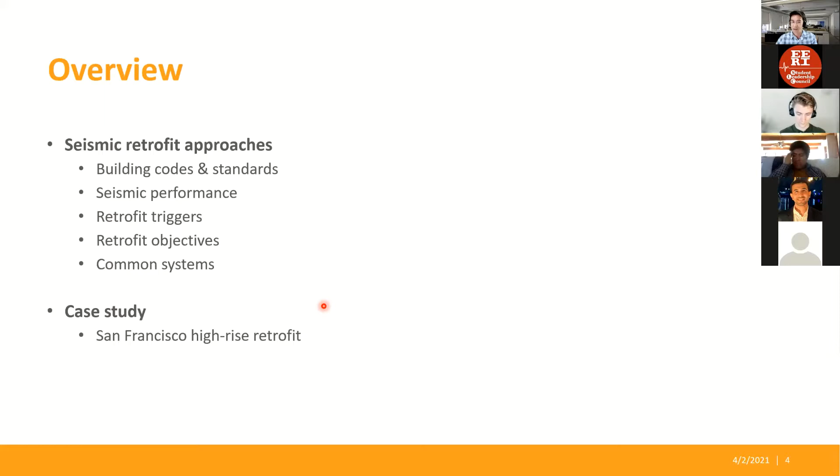So just to set the scene in terms of the regulatory environment in which we operate as practicing structural engineers, certainly in the US, we commonly design new buildings in accordance with the International Building Code, or sometimes, depending on the state, there might be a local version of the IBC, such as in California, the California Building Code, which essentially follows the same format as the IBC but has localized amendments specific to the needs of the state. The IBC works in conjunction with a standard called ASCE 7 that defines the loads, seismic hazards, and other design criteria we use to proportion, design, and run through code-conforming checks for new construction.

That works really well because it's almost a cookbook approach, where you look up a series of prescriptive requirements the building is required to meet, and you proportion and design and run member checks, ensure the building meets the drift requirements prescribed by the building code, and make sure all your demands are less than the capacities prescribed by the building code, using a single R factor for seismic design that divides the elastic forces down to a level of load used for design of code-conforming structures meeting all these prescriptive detailing requirements, whether for concrete, steel, or other construction types. This approach works really well where we have a lot of control over the variables in a new building.

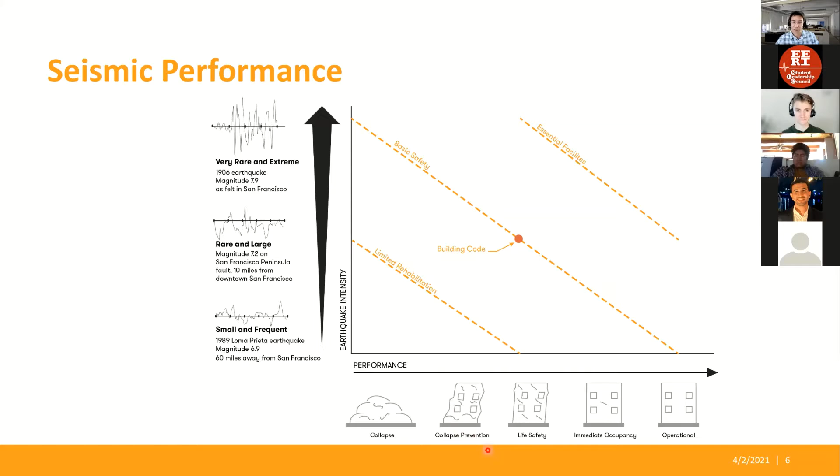They might, once you look at all the different limit states and deficiencies, perform at or meet that performance objective at a lower level of shaking, or they may not meet it at all—the analyses may show the building collapses, or qualify that it meets a lower level of performance at a lower ground shaking intensity in the as-is condition. This framework helps us understand where the existing building sits, and if a retrofit is triggered, what we're trying to achieve: are we trying to lift the performance, lift the hazard level at which the building meets a specific objective, or if it sits at collapse prevention, can we lift the shaking level at which it continues to meet collapse prevention, if that's the objective selected or mandated by a city or client?

So if we're able to run through some initial analyses that give us a picture of how the building is expected to perform at increasing levels of input ground motion or hazard, we can start to understand where the vulnerabilities lie, where the damage may concentrate in the building, and we can then inform ourselves as to how we might think about retrofitting the building.

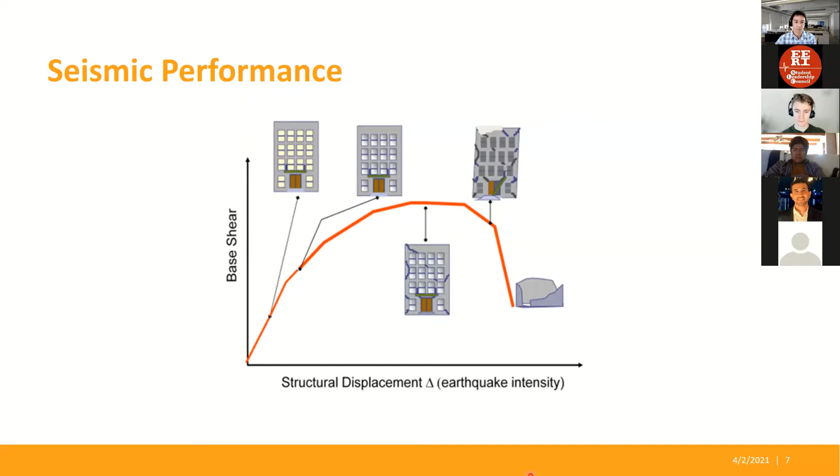There are 4 broadly defined levels of performance that feed into very detailed acceptance criteria and modeling parameters for components: collapse prevention, life safety, and this, as I mentioned before, is analogous to the level of performance implied by the building code when a code-conforming building is subjected to the design basis earthquake.

For higher risk category or higher occupancy structures, perhaps essential service buildings, I understand the balsa wood models you're all developing are around a hypothetical hospital. A hospital would fit the definition of an essential services building that serves a critical function to the community after an earthquake or major disaster.

Both the building code and ASCE 41 acknowledge that by requiring more stringent design requirements. This is reflected in ASCE 41 by requiring that at the design basis earthquake, or BSE-1 hazard as it's defined in ASCE 41, the building meets what's termed immediate occupancy.

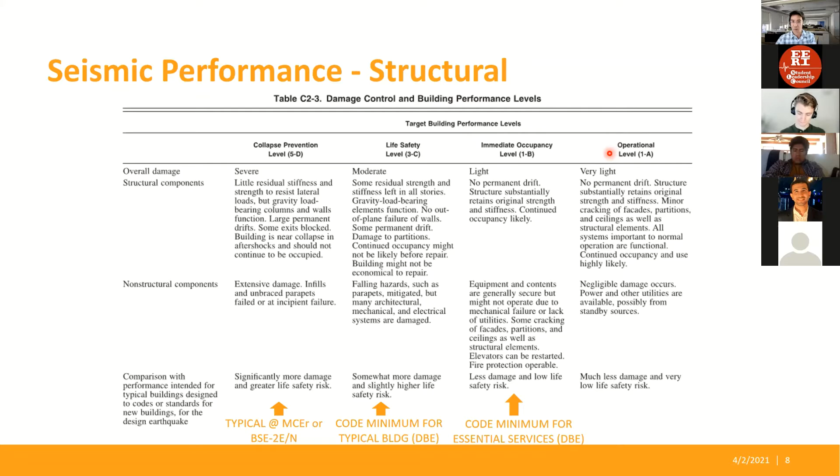There's another category as well, an even higher level of performance called operational. The main context for that—so far I've been talking about structural performance, how the primary structure of the building, the gravity systems, the lateral systems, perform in an earthquake.

The other important component, which I'll continue touching on as we go through the presentation, that we certainly pay a lot of attention to in our evaluation and retrofit work, and which is getting increasing attention at the national level, is the impact of non-structural performance on building resilience and functional recovery.

ASCE 41 does prescribe performance requirements for non-structural components as well. They're a little different from structural requirements and don't map across directly, but there are requirements for essential service facilities under what's called the position retention category of performance. There are also requirements, ideal targets to achieve for an essential service facility, around operational performance.

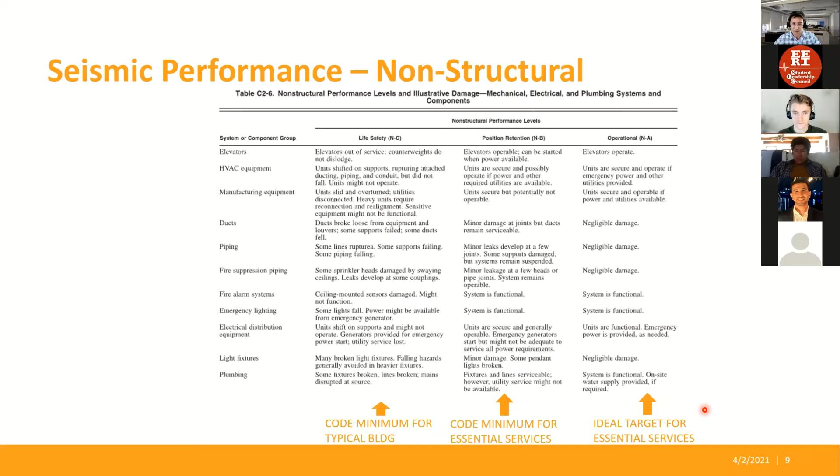A lot of the additional criteria that kick in for operational performance relate to non-structural elements and the continued operation of energized systems—electrical, mechanical components that keep a building running, elevators—making sure those components continue to be operational after a design earthquake. Not just that the building is undamaged structurally, but that components and contents helping the building function are actually operational, without needing maintenance teams to fix plugs that came loose or leaks that occurred.

To help further set the scene, I thought it'd be worth touching on why retrofit. There are all kinds of triggers that can result in us getting a project where we step through an evaluation of an existing building and start to develop retrofit schemes and ultimately implement them.

There are building code triggers in the IBC and also in the California Building Code, and other jurisdictions have their own requirements on top of that. Some common triggers: changes of occupancy, increases in occupant load, additions and alterations. If you alter the structural system of the building, you may be required to reevaluate it. If you add mass, stories, or a horizontal addition, there are triggers in the building code requiring evaluation.

And if you cross a certain threshold in the change of demand-capacity ratio, you need to step through a retrofit. In our practice, we'd typically be doing that in accordance with ASCE 41.

If the building is damaged or needs to be repaired, there are also triggers. If the damage is substantial enough, the building may need to be retrofit. Sometimes our understanding of the seismology of a given site changes, and the ground shaking intensity for the design earthquake may increase, which may trigger a retrofit as well.

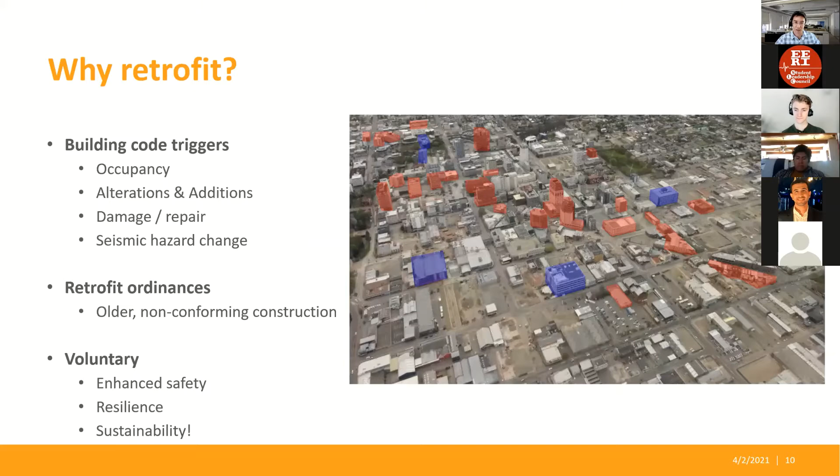We're typically looking to address one or more system characteristics. We're looking to add strength to the building. Perhaps we're looking to add stiffness, ductility capacity, energy dissipation, damping. We may also be looking to add stability or a restoring force to ensure the building can be righted and centered after the earthquake. Those are rocking, restoring systems to ensure the building doesn't have a permanent offset after a given level of shaking. We're also looking to improve the performance of non-structural components, whether through changing the building response, or improving the anchorage and bracing of non-structural components.

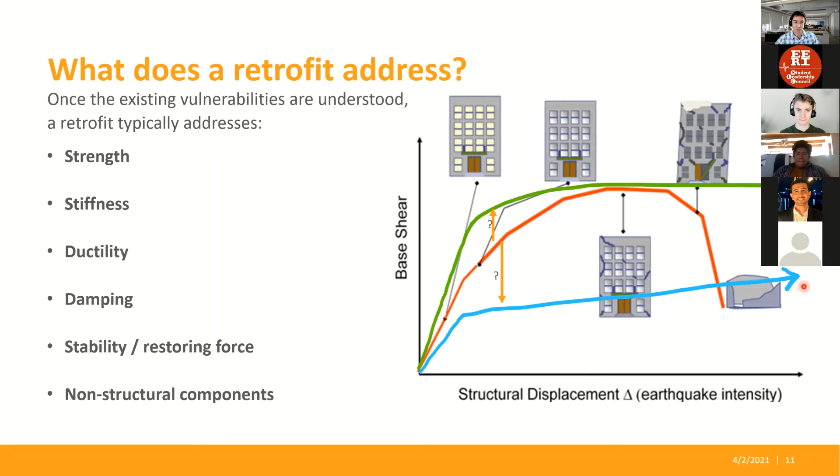So I thought it'd be good to touch on some common approaches to seismic retrofit that are outlined in a lot more detail in ASCE 41, but I'll touch on some of the ones that, and there are other systems as well beyond what I've got up here on the screen, but these are certainly approaches that we commonly use in our practice and are big proponents of.

So a few common approaches for seismic retrofit: concrete or shotcrete, which is a sprayed application of concrete to form reinforced concrete shear walls in a building.

Steel braced frames, buckling restrained braces have gained a huge amount of traction in the last 10 years in seismic retrofit. They've been used in new construction for a longer period of time, but we're seeing a lot of buckling restrained braces being introduced into seismic retrofits, perhaps to replace older non-conforming brace frame systems that don't have as good a ductility capacity. Special concentric brace frames are also a relatively stiff and somewhat ductile system that can be employed in a retrofit.

Steel plate shear walls, a little more common in new construction, but we have seen applications of steel plate shear walls as well in retrofit solutions. They're a very compact way of retrofitting buildings where space on a floor plate is tight.

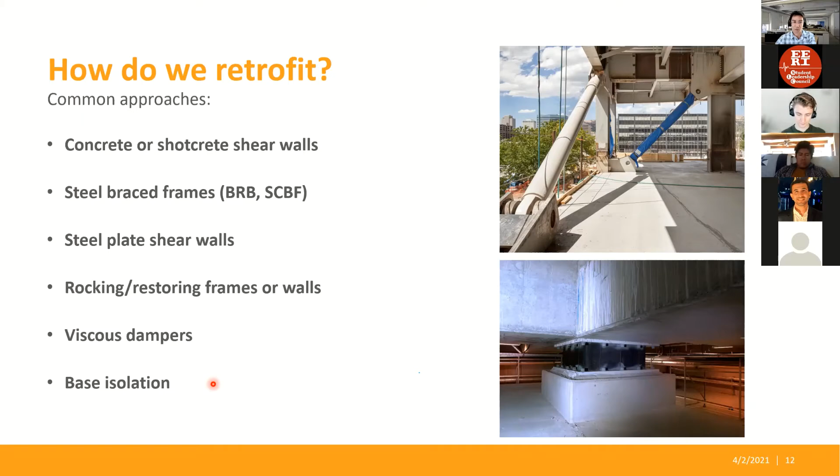So in conjunction with thinking about some of the biggest system-wide pictures around retrofit systems or alternate new systems to introduce into a building, there are other considerations that need to happen in conjunction with just thinking about the retrofit approach at a system-wide level.

We're always thinking about deformation compatibility. How are the new retrofit systems going to interact with the existing components in the building? Are they able to attract enough load or to control enough of the deformations to ensure that the existing components that may be part of the gravity system continue accommodating the deformations, or that their deformations are reduced enough that they are able to continue serving their function, say as a gravity load supporting element.

We need to evaluate the foundations and make sure that the new retrofit elements that we're introducing into the building don't add significant foundation loads in areas where we don't have enough capacity, or that we're strengthening the foundations as needed. Floor diaphragms, collectors, and connections are also important considerations.

Addressing discontinuities and irregularities in the vertical load carrying system are often a localized area that we study when there are discontinuities in the building system. And then also non-structural anchorage and bracing, trying to mitigate these types of hazards, which can have consequential effects, just even if the building is undamaged structurally.

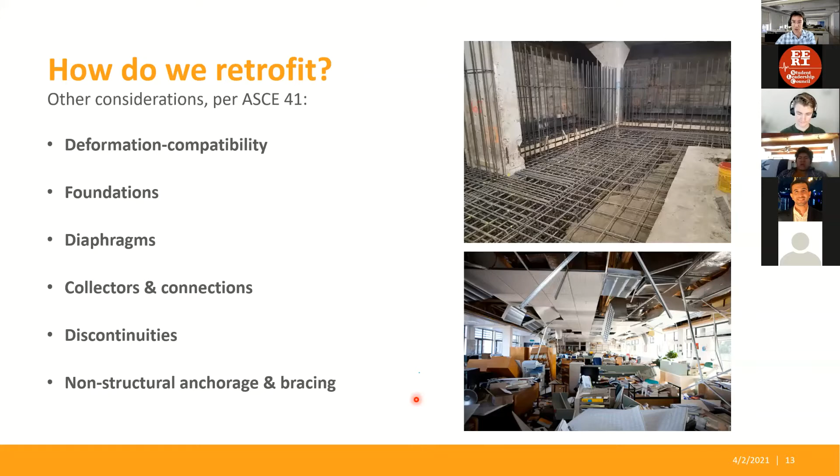So I'm going to talk a little bit in some detail about 3 different retrofit techniques that we commonly employ in our practice, and just quickly touch on pros and cons. So reinforced concrete shear walls, some pros: they're relatively stiff and strong, they have good ductility capacity, and they're a relatively inexpensive form of retrofit relative to other retrofit methods that I'll touch on.

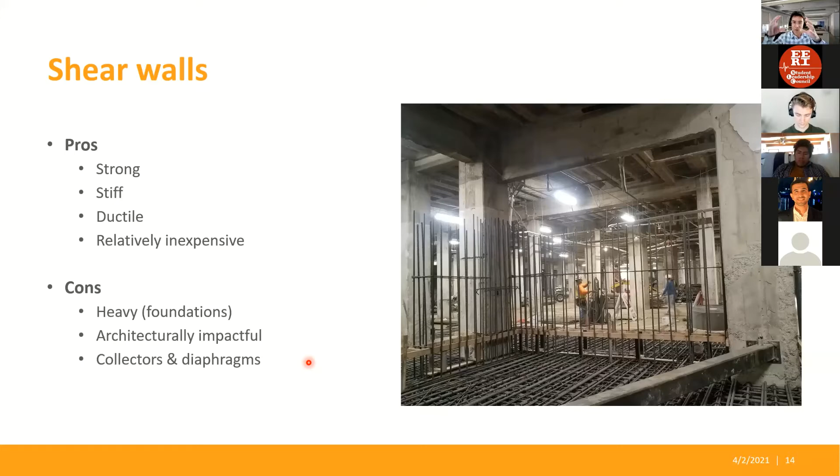Some of the cons: they tend to be heavy. They add mass to the floor plates and also to the foundations. They can be architecturally impactful. This is a concrete shear wall going in a building, and you're typically cutting off access through the floor plate, cutting off access to daylight by having solid wall elements. And you also need to introduce collectors and potentially diaphragm strengthening as well to transfer the loads around the floor plate to get them to where those shear walls are being introduced into the building.

Viscous dampers. These are a particularly effective means in relatively flexible structures in particular of reducing the demands to the primary building structure. The nice thing about viscous dampers is that they have this out of phase response with the primary lateral system of the building. So the forces that the dampers introduce are often not as additive, or not completely in phase with the response of the primary building structure. So they don't tend to add significantly to the column axial loads if you're engaging existing elements of the lateral system. And that's this out of phase relationship that we expect to see between velocity and displacement.

Diagonal braces are certainly advantageous in terms of allowing path of travel and daylight coming into the building, those sorts of things. We've found they're particularly effective at reducing base shear demands by up to 25% or more, depending on how they're configured.

The dampers are replaceable, and they have this great benefit of reducing floor accelerations. I'll share a slide on that in a second.

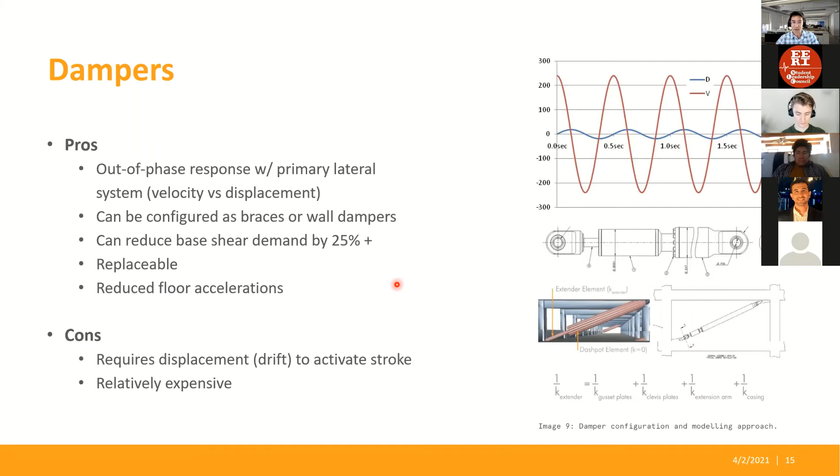We added the dampers, and we were able to pull those peak acceleration demands further up the building down to a much more manageable level for the design of the non-structural anchorage.

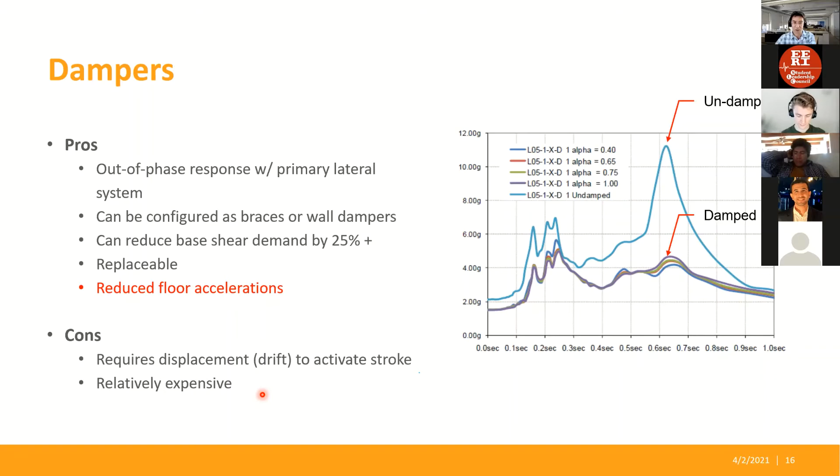A couple of cons around the use of dampers: they do require some drift to activate the stroke of the damper and develop the damping force, which means the building needs to continue displacing a reasonable amount. So deformation compatibility checks are very important to run through with a damper system. They also tend to be relatively expensive in terms of the technology. Some dampers have a lot of proprietary technology in them, and the availability of suppliers and sourcing can be a little tricky to navigate on projects.

This is an example of what I've been talking about with non-structural, especially with essential service buildings that have a lot of investment in mechanical systems to help the buildings be functional and provide the services needed. There's a lot of non-structural components and contents that need to be braced and anchored, so they don't have disproportionate consequential effects, like this building that was damaged in the Napa earthquake in 2014, where a sprinkler head or sprinkler pipe burst.

The building was otherwise not badly damaged structurally, but the consequence of a sprinkler bursting and flooding the building for a couple of hours until they could shut the water off resulted in a very expensive rebuild of the ground floor, with all the non-structural finishes being torn out due to water damage.

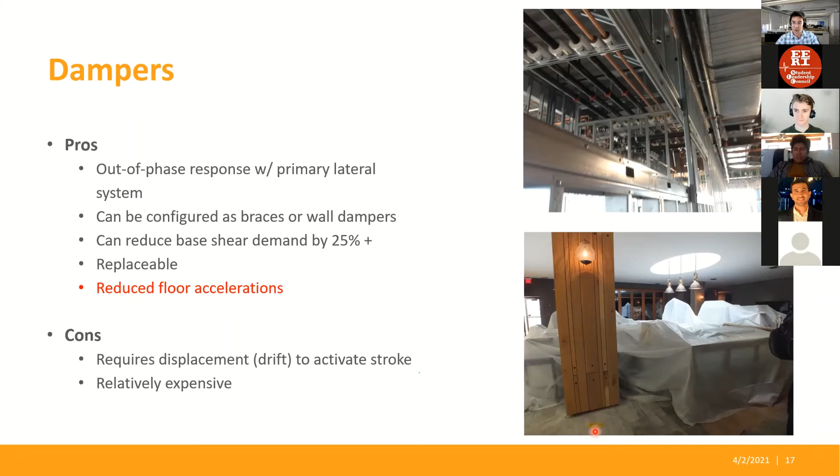This is an example of how we implemented dampers on a high-rise building in Wellington, New Zealand. We completed this project a couple of years ago. This building was relatively flexible, but had reasonably good strength and drift capacity—though it was overly flexible and had a pounding problem with an adjacent structure.

So we introduced dampers over the full height of the building in the flexible or weak direction, transverse. We were able to significantly pull back the demands in the building and also mitigate this pounding hazard as well.

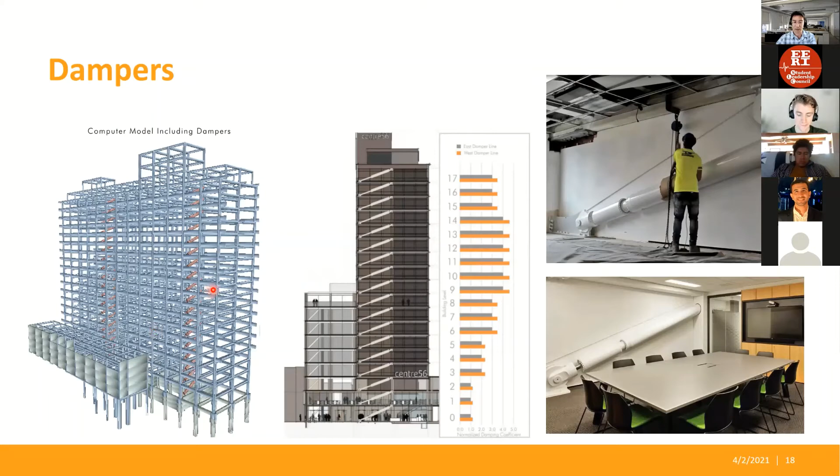Base isolation is seen as kind of the deluxe or Cadillac solution for the retrofit of particularly monumental and historic buildings, where we're trying to minimize the amount of retrofit work in the superstructure because of the impact on the architectural program or on historic finishes and fabric. There are a number of different base isolation technologies available: lead rubber bearings, friction pendulum sliders.

These components, introduced at the base of the building, help isolate the superstructure from the response of the ground by accommodating the ground motion across this isolation plane. They're self-centering, so the building returns to a zero offset after the earthquake, and the units are also replaceable if needed.

Some issues to keep an eye out for with base isolation: uplift or overturning demands can be difficult to accommodate with the isolators, as they're not great at resisting tension loads.

From a design office perspective, the design and approval process usually requires third-party peer review, so the design schedule needs to take that into account—certainly an issue we run into when considering whether base isolation is appropriate for some projects. And there's a cost premium associated with them for a couple of different reasons.

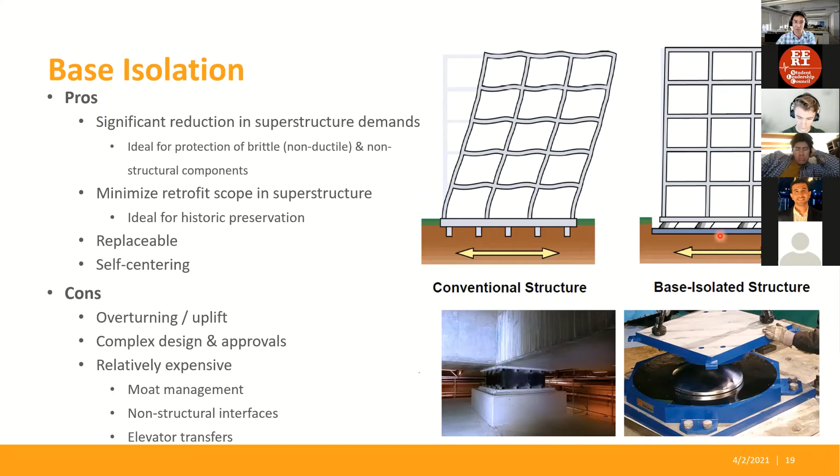But the big benefit from a structural perspective is that the isolation system shifts the response of the building significantly. You can shift the period from a fixed base building at say a half second out to 2 or 3 seconds, and that really cuts the input ground shaking demands down significantly. You also get the added benefit of increased damping. The isolators have significant damping capacity, 10, 20% or more, and that helps further reduce the input demands out of that elongated period.

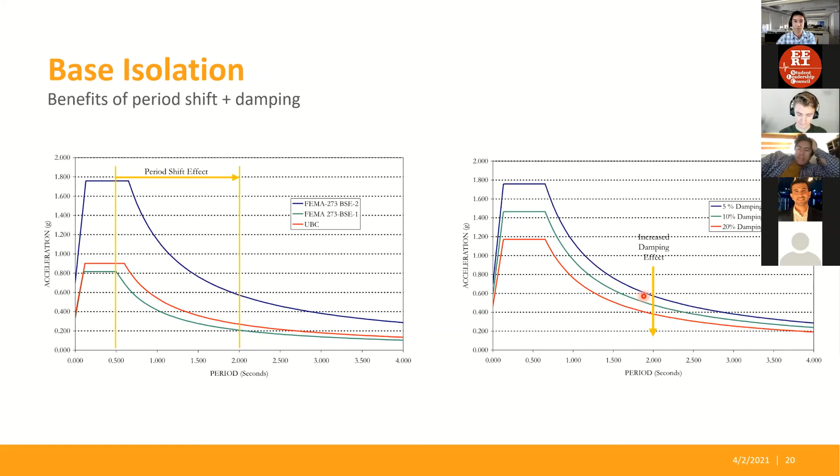So I thought I would share a quick case study of a retrofit I worked on in downtown San Francisco a few years ago that was completed, particularly near and dear to my heart. It's 140 New Montgomery Street in downtown, just south of Market Street for those familiar with San Francisco. I thought this would be a great way to show an integration of a few of the different retrofit philosophies and techniques we've touched on through the prior slides.

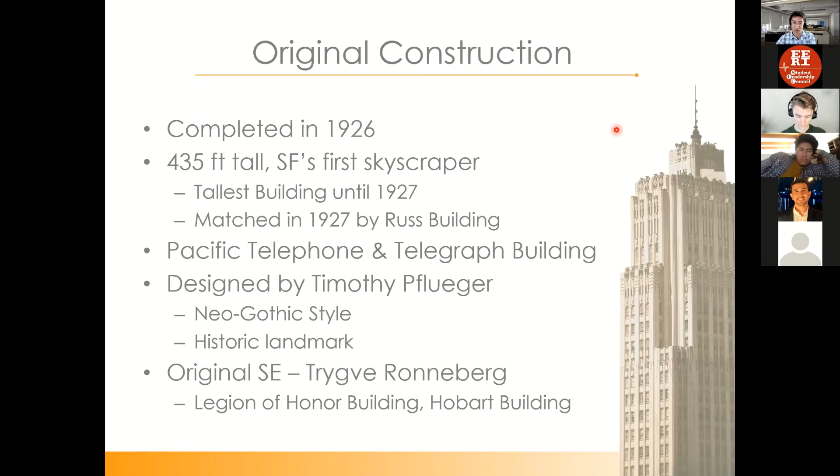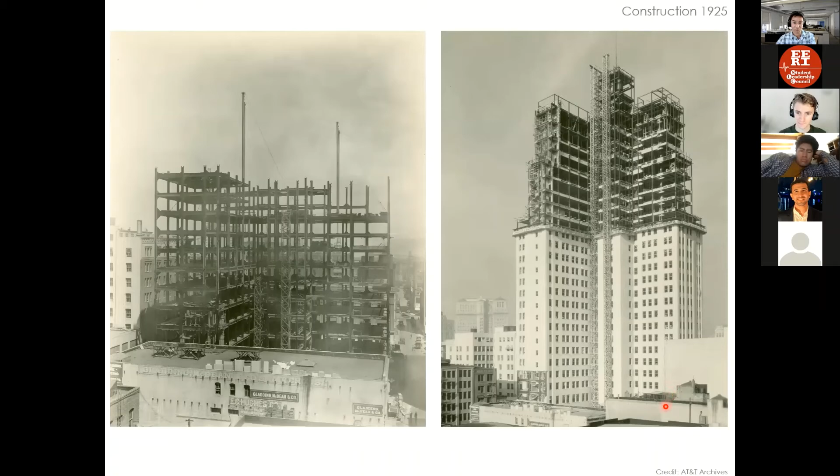Some images of the building going up during construction, it's a riveted steel moment frame. Interesting, and I'll touch on this in a second, they were paying attention to lateral loads at the time. They designed these haunched, what they called wind gusset connections, around the perimeter of the building to try to stiffen the frame and provide some inherent lateral resistance at the perimeter. Then also the building was encased, all that framing was encased in concrete, brick, and terracotta to provide fire rating resistance. But it also contributes, as we've found through the analysis we've done, to the strength and stiffness.

Some completed photos of the building in 1926. This was used as a telephone exchange building, and some beautiful historic photos of what folks used to be doing in there.

But then not much changed with the building from 1926 to 2008. It kind of looks pretty much the same - a beautiful historic lobby, entry lobby that we were really pleased to have preserved as part of the retrofit.

We were very fortunate to work with a great developer who purchased the building from AT&T, and they articulated this fantastic vision that really helped drive us with our selection of retrofit approach and how we approached the design and detailing as well.

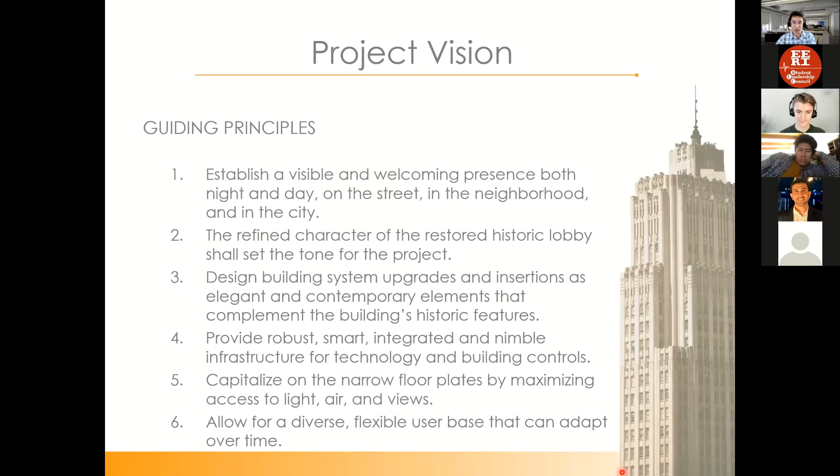So some of the other conditions in the building - I don't know if people are familiar with Mad Men, but the corridor layout in this building is very much the same as a scene out of Mad Men. I was half expecting as you walk down here to pop open one of these doors and Don Draper's sitting in there smoking a cigarette and drinking a martini or something. But yeah, pretty stagnant office layout and not conducive to the modern needs of building tenants in downtown San Francisco when we started looking at this in late 2008.

The facade had fortunately had some retrofit work done to it, and they'd also mitigated these amazing Falcon busts up at the roof of the building that help guard the building, I guess. They used to be terracotta, very fragile and brittle, but they'd replaced these with fiberglass busts back in the 80s, which was certainly helpful from a non-structural perspective.

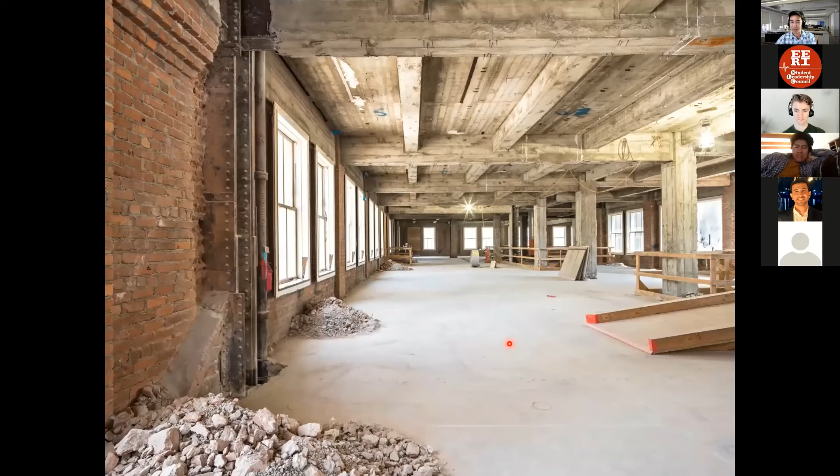We spent a lot of time digging into understanding the existing building after they'd gutted all the finishes and interior of the building. We went through an extensive material testing program to understand the capacities and strengths of the steel, the rivets, and the brick infill, so we could develop a comprehensive understanding of how the existing building would perform.

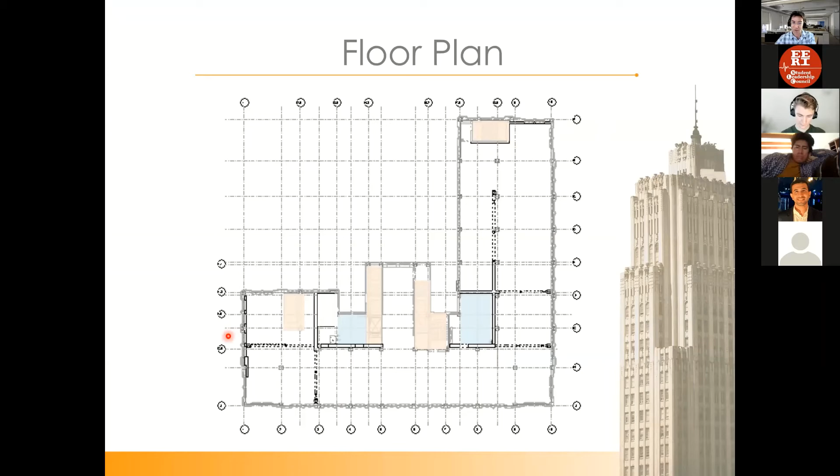We went through and did a lot of component studies on how the masonry facade would interact with the structure, which contributed strength and stiffness, but not a whole lot of ductility. We wanted to see how that interacted with the steel framing, so we did a lot of sub-assembly studies.

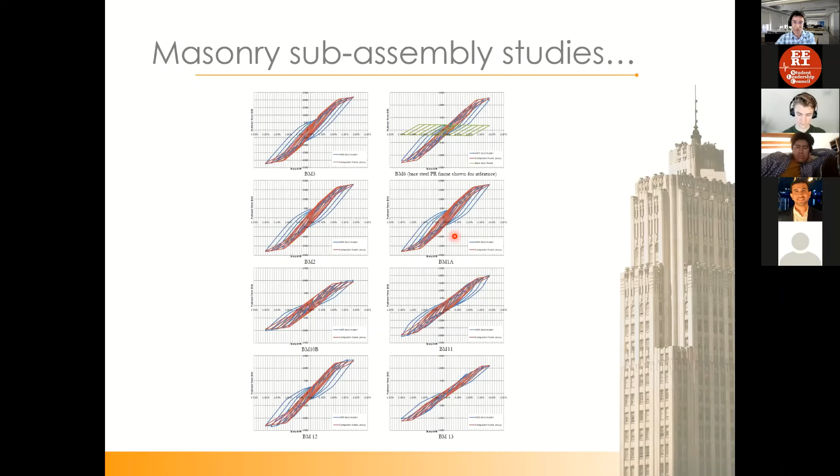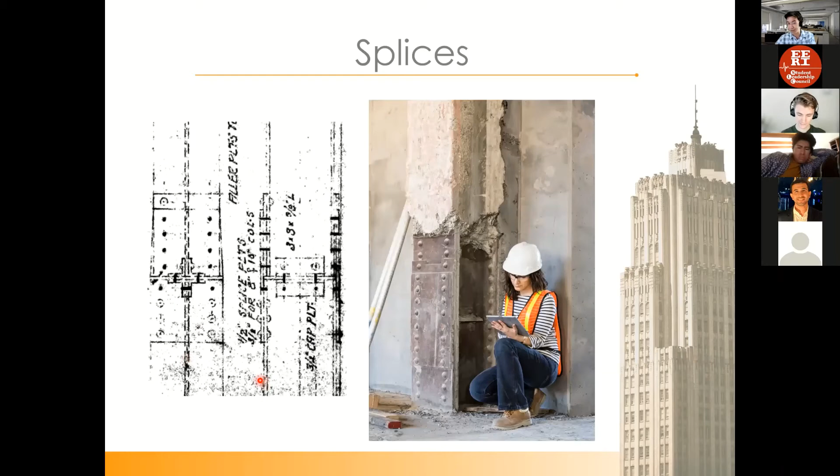We did that for every single configuration that we could find up the height of the building, because the infill systems varied. We also did some material testing and found that the column splice details didn't always match what was on the drawings. Well, the drawings were really hard to read, so we needed to go and do investigation anyway.

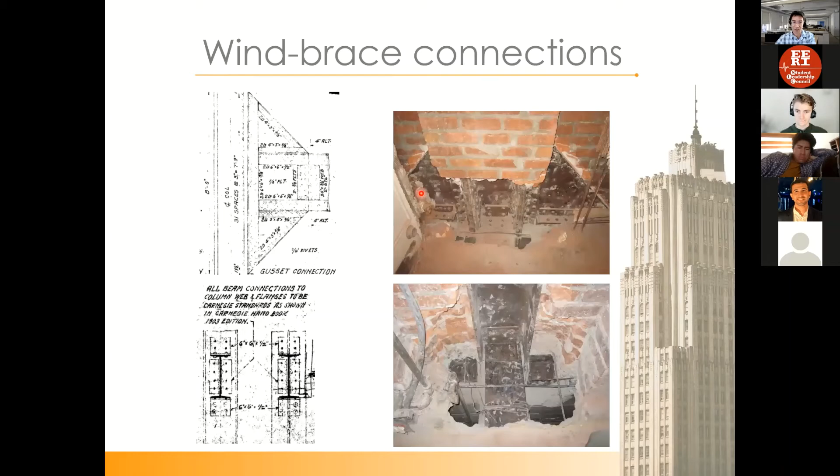We went through and studied these wind brace connections that I showed on the photo earlier to gain a good understanding about how these connections were detailed and how they were built, and incorporated those into a 3D finite element model of the building. We studied the building's performance relative to varying levels of hazard and started to identify where the weak spots were.

Columns and column splices were vulnerable. The facade was vulnerable to damage because of excessive drift demands at the perimeter. And we had some areas of weak or soft stories developing because of irregularities and setbacks in the building framing over the height.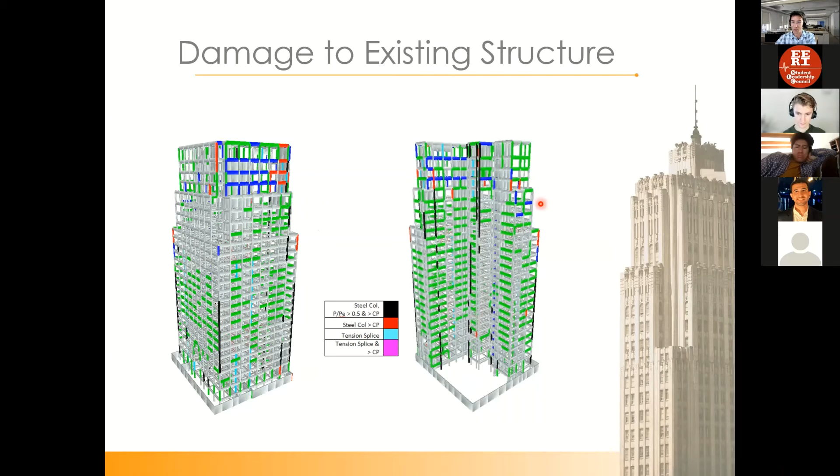So there were a couple of reasons we went through the retrofit. We were triggered by the San Francisco Building Code because of the extent of the renovation scope. But it's a historic building, so there were other factors that came into play with how we approached the retrofit. We had to adhere to the California State Historical Building Code in this particular instance.

And we employed ASCE 41. It was the 2006 version at the time, but we're now working with the 2017 edition. The criteria we worked with was to evaluate life safety, designing the retrofit to achieve life safety at 75% of the design earthquake, or BSE-1. In conjunction with our peer reviewers, we worked through a process of providing additional protection of critical force-controlled actions in the building that we all identified and agreed was important, to ensure the building had some additional robustness over just meeting the single performance objective.

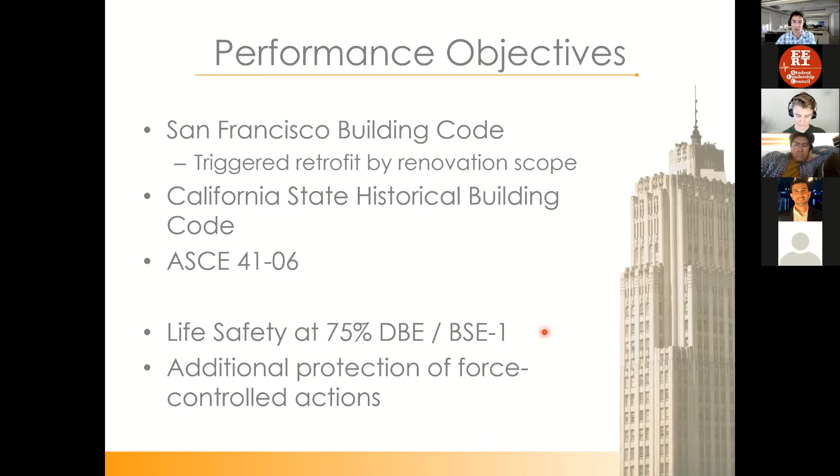This is the approach that we took to thinking about how to evaluate different retrofit approaches. Now this was tailored specifically to this building, but I think you could easily apply this type of philosophy when thinking about how to approach retrofit of other building structures and other tenant needs or other drivers on a project.

It's an integrated and iterative approach. We think about constructability. We're thinking about how the retrofit minimizes the impact on or reduces the demands on the existing elements—sometimes it's the foundations or the historic fabric that we're trying to protect. We're thinking about the overall cost, impact on the floor plate so that it's still a usable, functional building that can be rented out to tenants, and similarly feeding into that the architectural layout implications as well. We're coordinating with the architectural layout, as I'll show in a second.

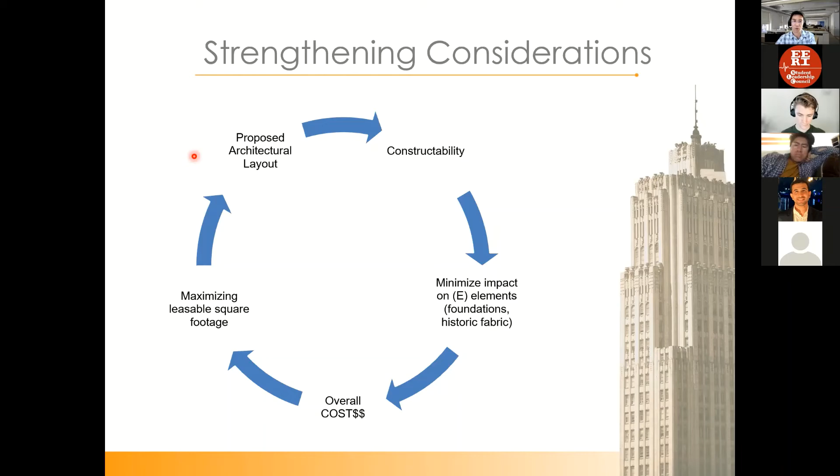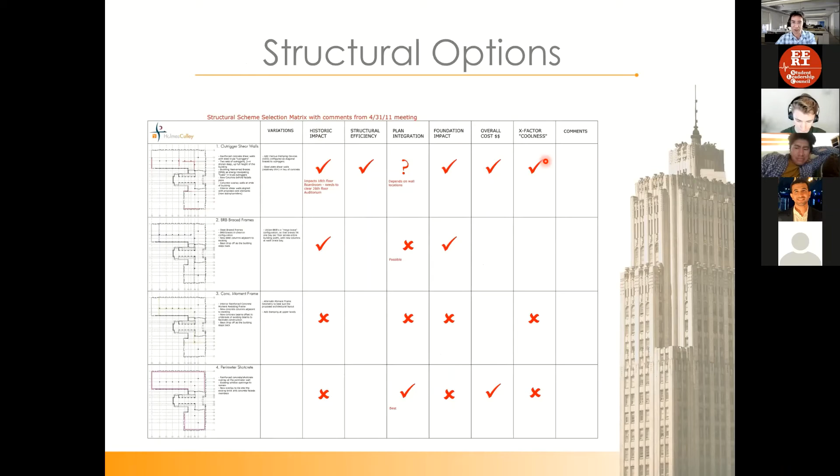We found it helpful in our discussions with our client to have a matrix of options, and we put weighting factors on things important to everyone on the team: historic impact, structural efficiency, plan integration. It was important on this project to minimize foundation impacts, overall cost, and our client wanted to know about the coolness factor as well, given how much we were pushing the boundaries with the solutions we were coming up with—something outside the bounds of what would otherwise be a vanilla reinforced concrete shear wall retrofit scheme.

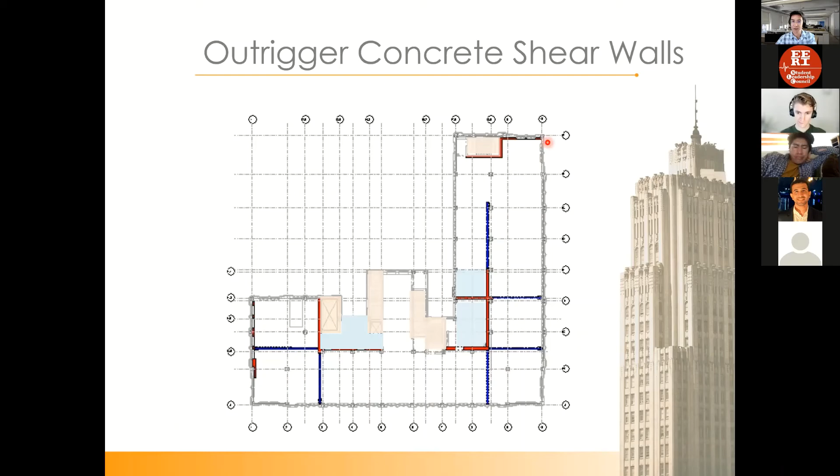The solution we arrived at for this building was a reinforced concrete shear wall system with BRB outriggers. This is a typical floor plate showing where we put the reinforced concrete shear walls in red, and the blue lines are the outriggers, which I'll show in a second. We also added some shear walls at the ends of the building to help control torsion.

This is a 3D view of the reinforced concrete shear wall system with these buckling restrained brace, 2-story deep outrigger trusses that engaged a reinforced concrete encased steel super column at the perimeter of the building.

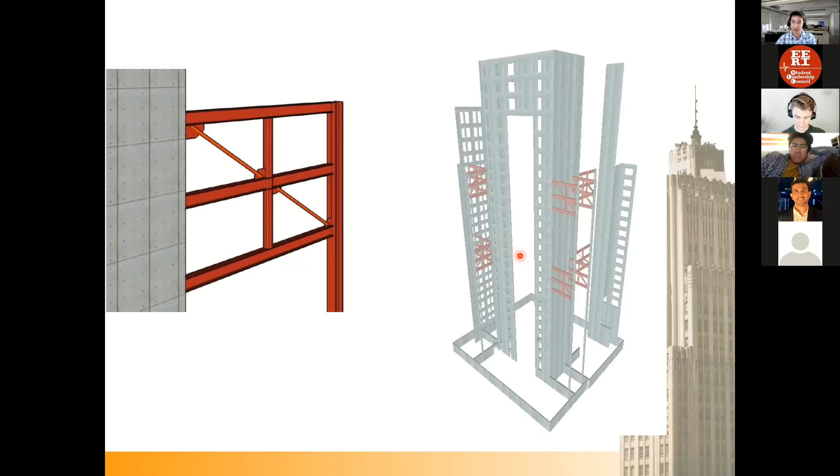This really added a bit of everything I've touched on before in terms of what we were using the retrofit to achieve. It added strength. We gained ductility by having this buckling restrained brace outrigger that fused and helped limit the demands that the concrete shear core and shear walls saw. We added stability through a rocking foundation system, and also through the stabilizing effect of these outriggers that helped introduce additional points of inflection over the height of the shear wall. We also added collectors to drag the loads around the floor plate to get to these more concentrated locations of lateral load resistance.

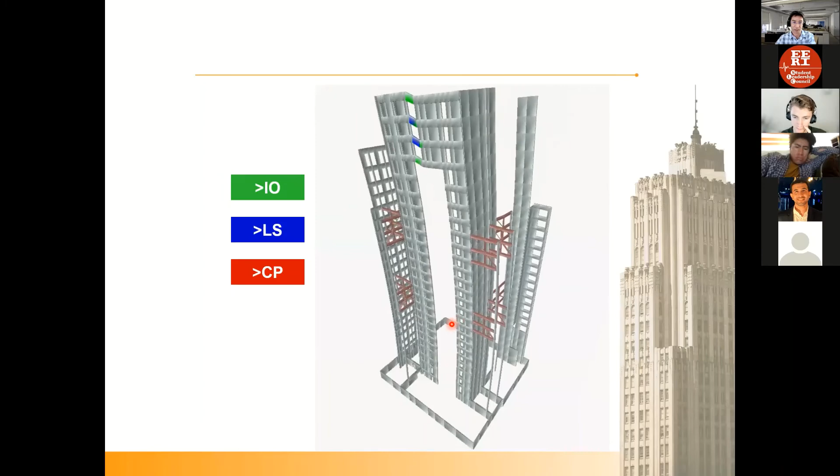I'm a little short on time, so I'm happy to play these videos later if there's time, but this is where we simulated the response of the retrofit only to a suite of ground motions using a nonlinear analysis. We were able to explicitly evaluate the performance of the new lateral system.

We then also went through and looked at deformation compatibility and considered the entire building system with the new retrofits integrated, evaluating the performance of the building in its combined state. There are always surprises that come out of an analysis like this—we found that the existing columns at the perimeter of the building still needed strengthening because of the induced demands from the drifts; we just weren't able to pull the drifts back far enough. So we did some column strengthening, and we also strengthened the splices to ensure the columns could develop and deliver the loads being induced to them and get those down to the foundations.

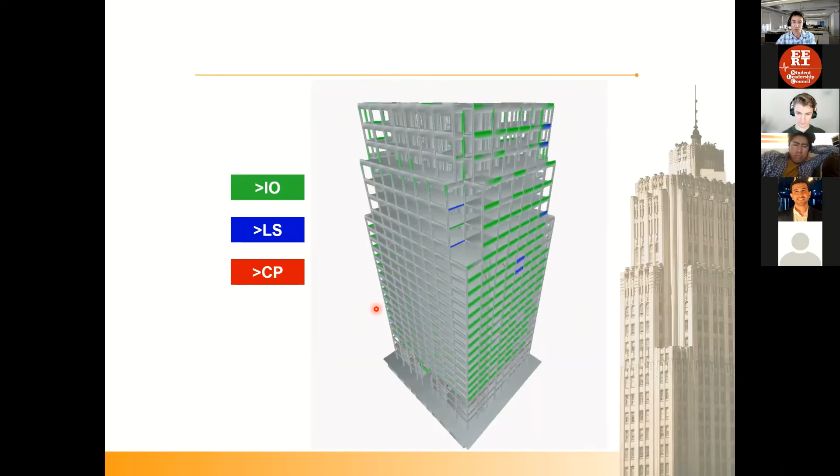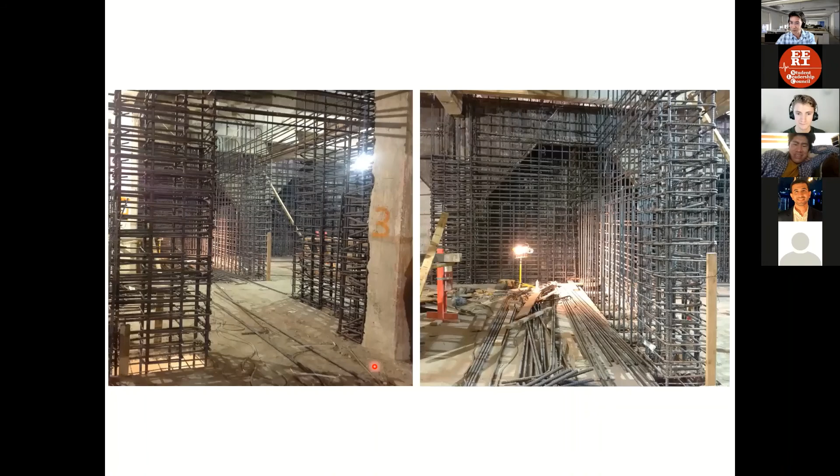These are images of the reinforced concrete shear walls being constructed through the building, cutting out the floor slabs, preserving some of the gravity framing, and in between detailing the rebar and boundary elements to pass around the existing floor framing, so we maintained the gravity load path.

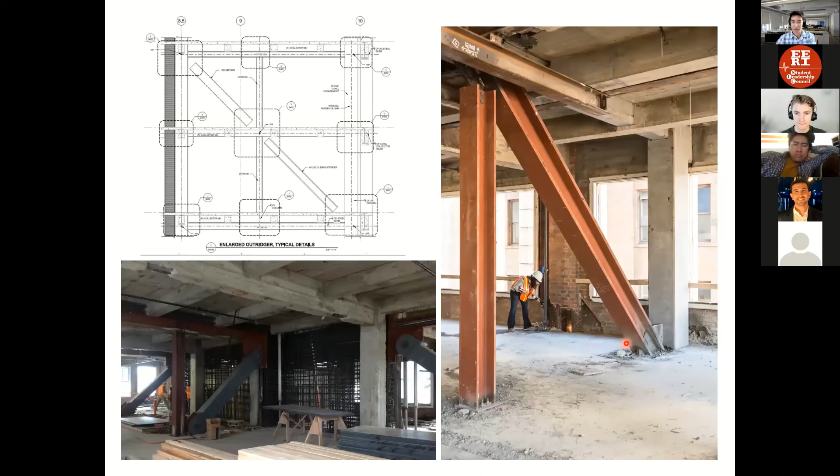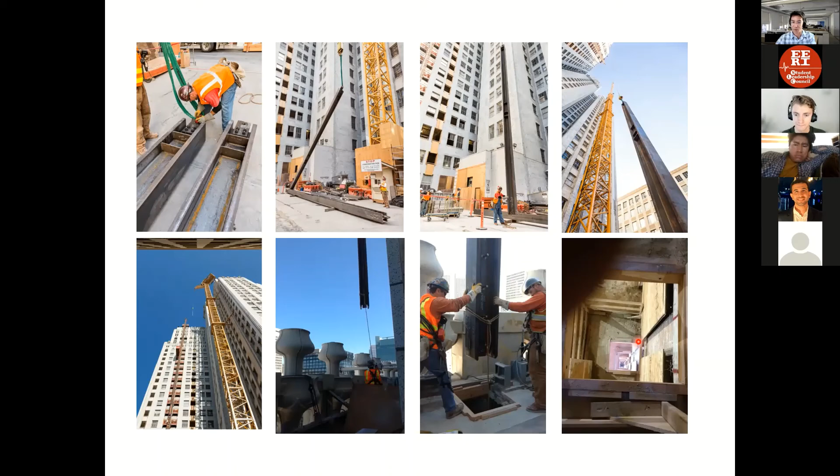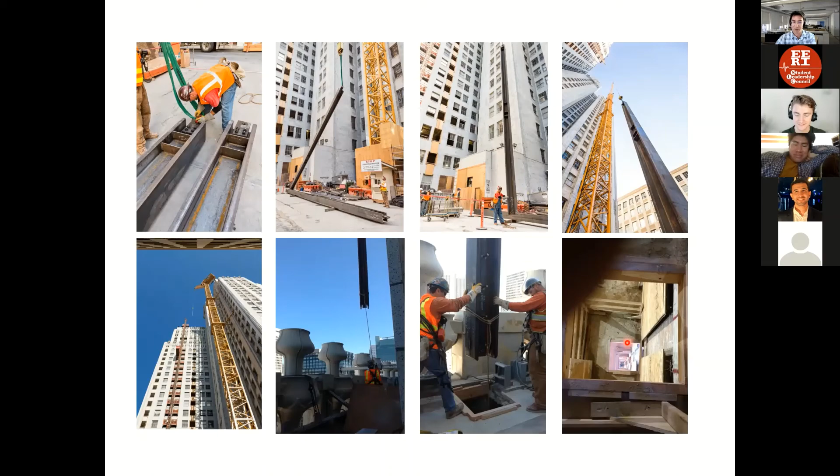This is one of the outrigger trusses up the height of the building, engaging that super column. We had a fantastic contractor on this project—they picked up these embedded steel super columns with a tower crane, several stories tall, and dropped them down through the height of the building, all the way down to the foundation level from the roof, landing them on a grout pocket on top of one of our foundation walls, then spliced all the columns together and encased them in concrete.

So that wraps up the formal part of the presentation. I'm happy to take questions, open it up for discussion.